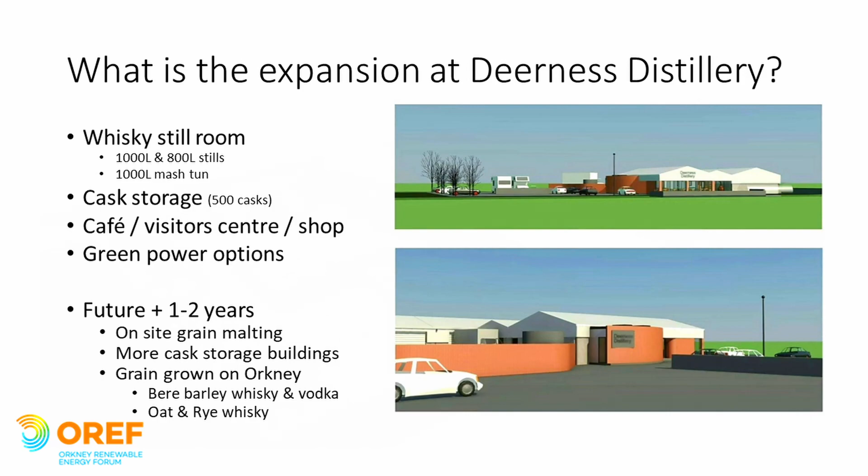So just trying to reduce our carbon footprint wherever we can. The grey picture of the building there is the existing building, and it gives you one more extent to the building expansion.

The little small narrow building in between the existing building and the shop is our whisky area. You see the polytunnel at the far end, cask storage in the back, and on the side where the cafe is, it's jutting out, almost like a whiskey barrel coming out of the building, and that's the shop area.

And then obviously you've got some car park there and some electric charge points and things like that. We've got an outdoor area for the days when you get a nice day to eat outside in Orkney, as long as the midges don't come out. And we've got the loading area at the back end there, so we kept our public and delivery vehicles separated.

Next slide. So the green issues we're already doing: our glass bottles, we've got paper labels, all of our boxes and packaging. Most businesses nowadays are really focusing on their eco footprints. Our packaging tape is paper tape with tree gum.

So it's all recyclable. Botanicals, we compost those when we're using our polytunnel for fertilizer. We grow lots of botanicals on site - lots of lemon, citrus growing, orange, mandarin, limes. We've got avocado trees, not doing too well though, but we've got one of those.

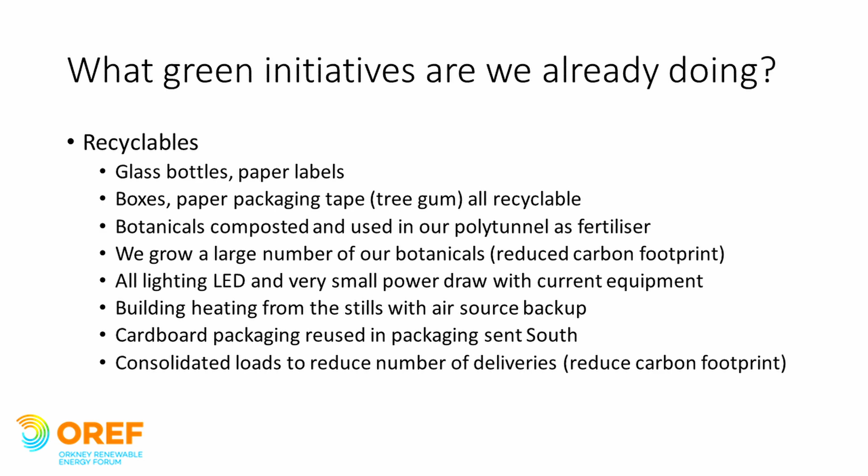Consolidating loads - we're a member of Orkney Food and Drink. We're working with some of our other partners in that to try and consolidate loads moving south. That's probably a big thing for Orkney, bringing stuff up and down all the time, which does cost us additional compared to our competitors on the mainland. We try to work together to consolidate loads and reduce deliveries, again reducing our footprint.

So Deerness Green Power, what are the options? Part of our expansion plans, we're looking to try and go off-grid and also looking at a water supply. Technology we've been looking at includes turbine systems, compressed air energy, and battery storage, which is something I've had a bit of experience with in Australia. I'll talk about that a bit further in a minute.

Also looking to convert our stills to electric, running off turbines. So we've got the elements in the actual stills, and we'd take the stills off using that rather than using propane gas like we do at the moment. We can take the stills off the power.

Biogas - there's been quite a few things talked about in Orkney regarding biogas. I think there was recently a study done, and a few people I've noticed in here actually got the meeting. In my previous life, I've actually designed, commissioned, and constructed 3 big biogas plants up to 1 megawatt with diesel gas trains off the back end of those. So quite a lot of experience in the CHP side of things.

Solar as well - quite a few people doing solar panels at the moment in Orkney. Obviously you need good sunshine for that. I'm from Australia, perfect over there, potentially not as good here. We're looking at a solar system, and then the potential for a mix of wind and solar as well, and then the water source.

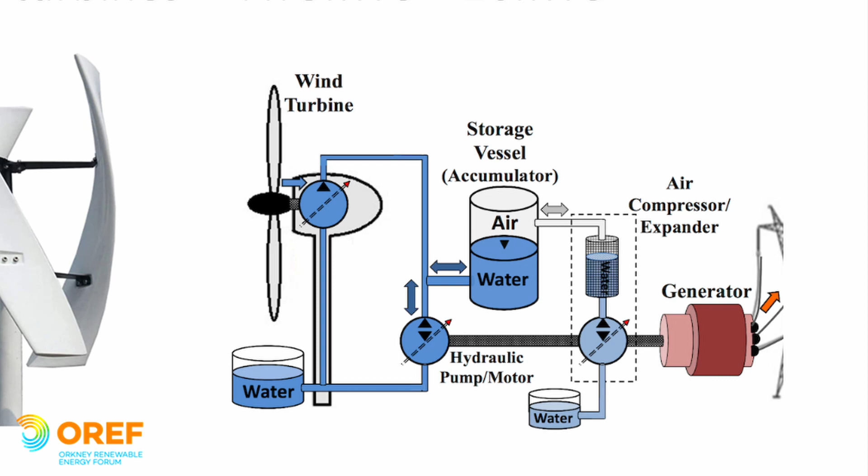So for turbines and things, we've been looking at some vertical turbines, which is a bit different. This depicts a compressed air energy storage system. We've got a bit of a turbine, some water into a storage vessel and accumulator there, and the turbine is powering a small compressor, which is compressing that tank. That's effectively a storage battery. What you've done there is used some of the energy to create a storage accumulator, and at a later date you can release that accumulator through a generator, and you're still producing power off what you've already put into it.

So when I was in Australia, I worked on a huge 600-kilometre pipeline, oil and gas, and water. It's a coal seam gas project, and we had 600 kilometres of pipeline linking all of the coal seam gas, taking it through right up to north of the Gold Coast, to an LNG plant. As part of our testing, it was all poly pipe, and we used to pump water and air into a pipe and do QA to ensure the welds and everything were perfect.

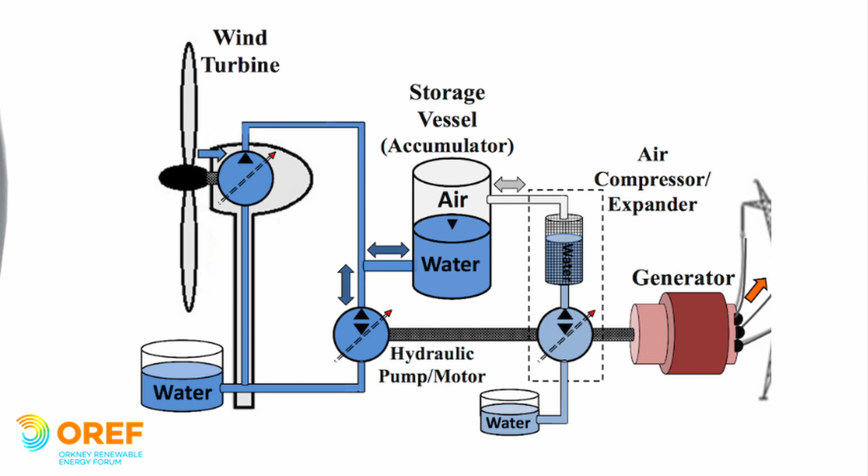We pumped the accumulators or the welder up to about 150 times its volume, and then you'd check the welds and release that. The released air would take probably about a week and a half to release all the air. So while we were there, I decided I'd put a little turbine on the back end and see what we're getting out off the back of this. The turbine span for about a week and a half off the accumulator, so there's some good merit there. We're just doing a small experiment with that at the moment, just to see what that looks like. Obviously, being an engineer, I enjoy this sort of thing, so we're going to do a small test bed on that one.

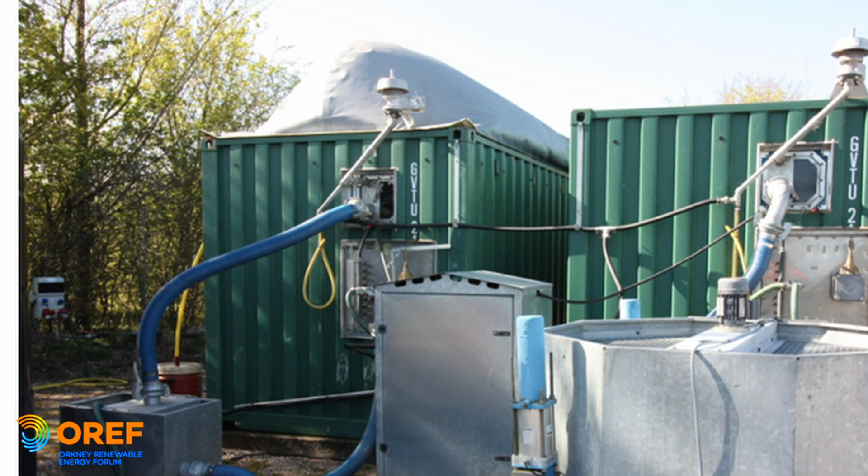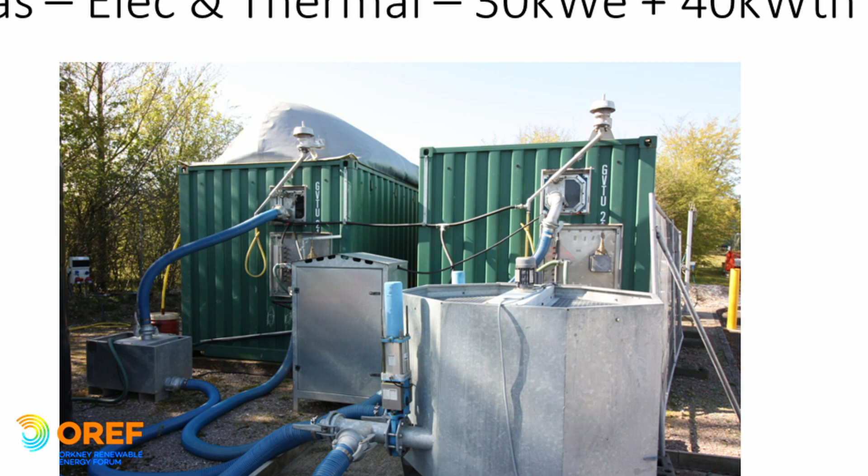So biogas, electrical and thermal. These are two 40-foot containers. The left-hand side is the feedstock with the gas membrane, which has got a little gas dome on the top there. So you put your feedstock into there, inoculate that, and you start to produce your own methane through a burner, through a turbine. You can produce 30 kilowatts electrical and 40 kilowatts thermal off those two systems. We've been speaking to the company that produces this system, they're UK based.

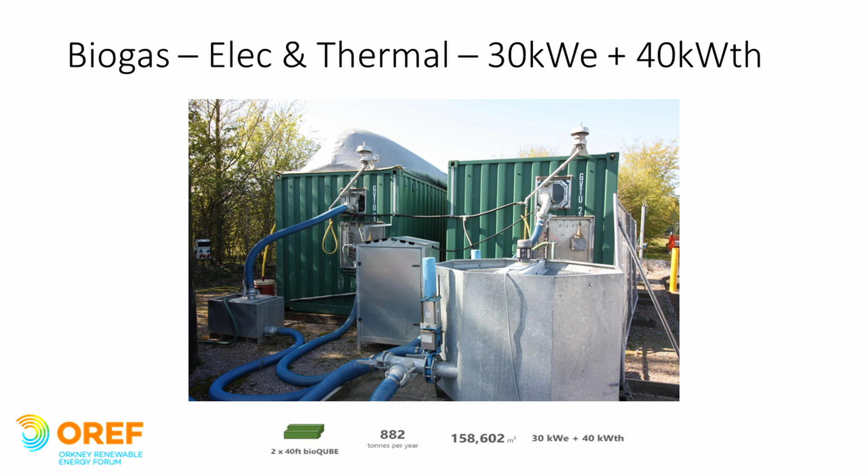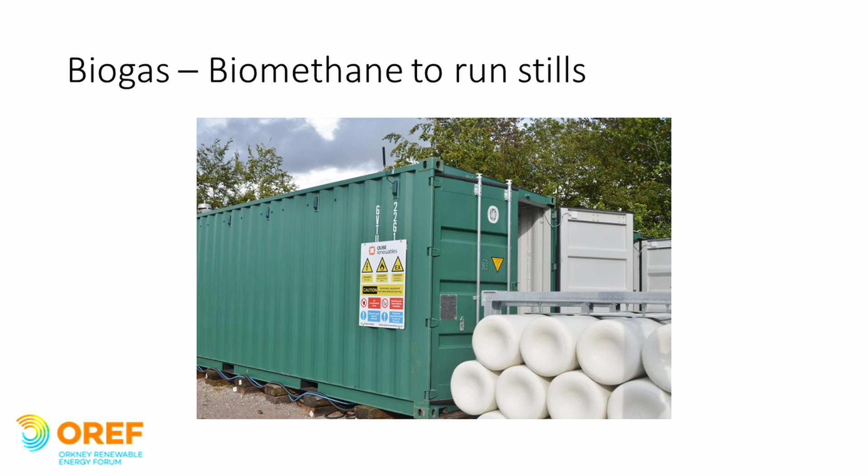We produce, when we start doing our whisky, mash coming at the back end, we're going to have all our botanicals, all our composted materials. Speaking to quite a few farmers in our local area as well, there's potential to pull some of that waste that normally goes onto the fields or wherever else into this. And from that you can also run biomethane, biomethane tanks, which could then be our power for the stills, another option. We're just in discussions with these guys at the moment, seeing what that system looks like, and obviously what the capital cost looks like. There's no point spending £150,000 on a machine that's going to take 50 years to pay back, so we're always looking at cost benefit analysis on the whole thing.

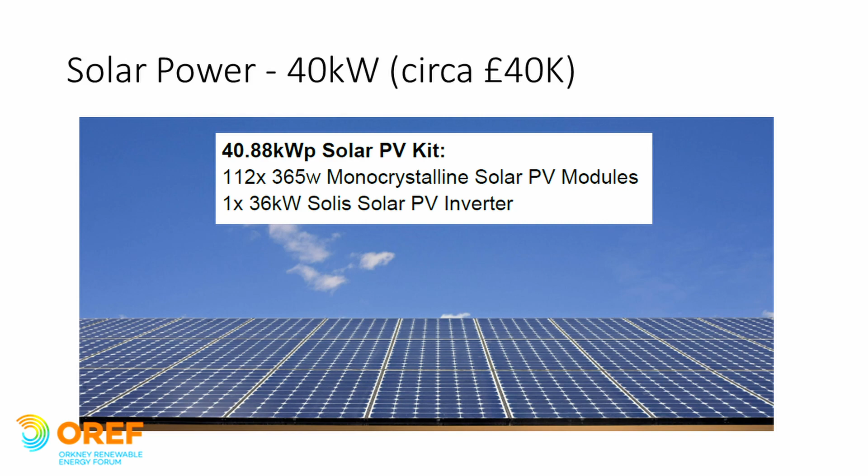This is a recent quote I had for some solar panels. That's a 40 kilowatt system, so circa £40,000. Obviously, you're not going to be pulling 40 kilowatts all the time - in the winter time, maybe down as low as 10% on the actual solar panels. So I've been looking at that as well. This is an off-grid system, a complete system that ties into our existing system, and then we can dispense with the power from the grid.

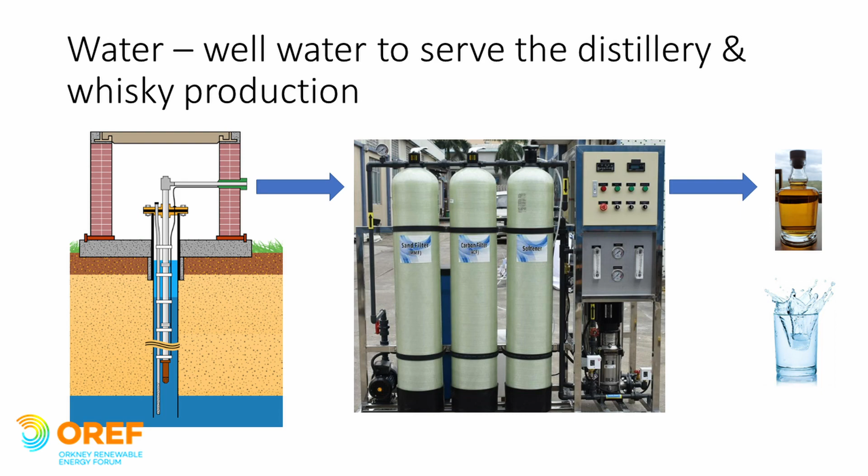That was just me looking at some of the tidal options. I thought they'd be quite interesting to anyone in Orkney who's had a look at that before. Tide comes in, tide goes out. There's quite a big catchment area just in there, and no one really uses that area. There's lots of other areas like that as well.

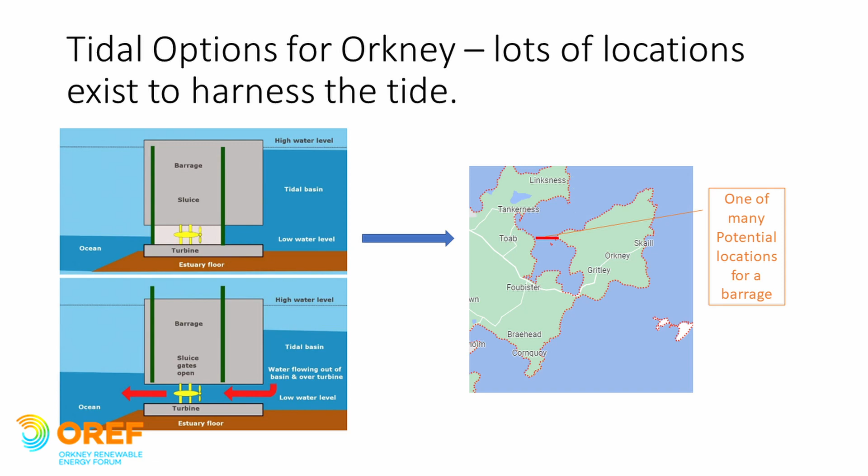So we do have a new email set up called Whisky at Deerness Distillery. We're going to be doing very soon a pre-cask release of our casks. We've got 250 casks, which will be coming up for release. Obviously they won't be released as in you can't drink anything, because it'll be 8 years plus before you'll actually be drinking anything, apart from once a year we get a 200ml bottle to try. So yeah, any questions?

Obviously a lot of the power things we are looking at, we're just currently talking to people about those. We haven't got any finite details on those sort of things. Some of them depend on our cost benefit analysis, whether it's actually worth spending the money, depending on how much our pence per kilowatt hour is moving forward. There's some ridiculous prices out there for businesses - some of the guys in town, 60, 70, 80,000 pounds a year, which is crazy money to try and make a profit from that.

As we move forward with our whisky expansion, especially with the malting machine and also the mash tun, they're electric driven, so we'll have a much higher load than we are now. So basically we're looking at how we can actually off-grid ourselves or supplement most of our stuff.